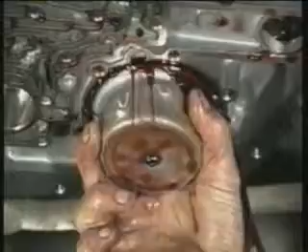Welcome to the world of the Transgo High Performance Shift Kit. In this video presentation, we'll show you step by step how to beef up your turbo-hydromatic 4L80E transmission fast and easy with a Transgo Performance Shift Kit. You'll love it. This transmission is about to come alive.

Video shows a typical installation with the trans still in the vehicle. It will help you install this kit with confidence. While you are watching this video, stop the tape often and read the instructions. This booklet has the specific instruction. Follow the booklet to the letter through the entire installation. During the installation, finish and review each step before moving on.

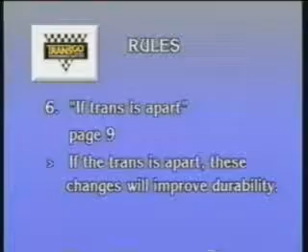When installing springs, follow the instruction sheet for customizing options, size, location, and color. When drilling holes, follow the instructions for their location, size, and customizing options. Follow the Shift Kit customizing options when they apply to this installation. Notice the If Trans is Apart page 9. If the trans is apart, these changes will improve durability. These are the typical tools needed to do the installation.

First, let's road test the vehicle to see if the transmission is in good working condition. We just want to be sure it has 4 forward gears and reverse. Place the shift lever in the D or third position, not the OD position. Push the gas pedal to about 1/4 throttle. Feel the 1-2 and the 2-3 upshifts.

Then at 45 to 50 miles an hour, move the lever to the overdrive position to feel 4th. This will tell us if the valve body is working normally. Then try some upshifts at 3/4 throttle to see if the clutches are in normal condition. They're holding okay. Let's get started.

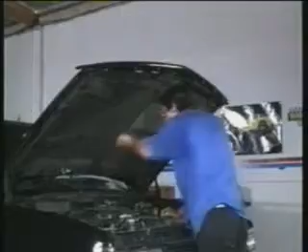Release the hood latch. Let's raise the hood and remove the transmission dipstick. Okay, let's jack the front of the vehicle up like this. Place 2 stands, one here and one here. Now we can jack up the rear. When you're done, it should look like this. Please use sturdy jack stands.

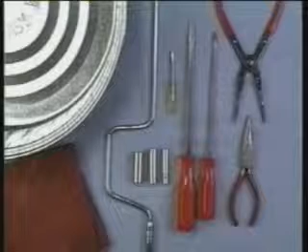Before we go under the car, let's gather the required tools. We will need 8, 10, and 13 millimeter sockets, a speed handle, long screwdriver, small screwdrivers, drain pan, snap ring pliers, needle nose pliers, and some wiping rags.

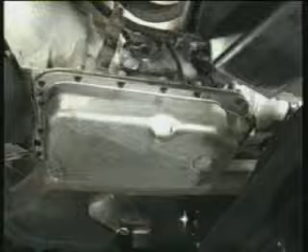Let's make sure you have the transmission that this kit fits. Notice the pan is large, rectangular, rounded here in the back corners, and it has 17 pan bolts. Here on the driver's side, toward the rear, we have this large electrical connector and many wires going to it. Here's the line pressure tap and the shift linkage. This is the right transmission. Let's get going.

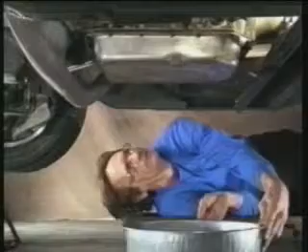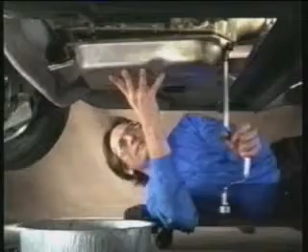Place a drain pan under the transmission, favoring toward the front. With a 10 millimeter socket and a speed wrench, remove all the oil pan bolts except for the one toward the rear here. Then loosen the last bolt slowly and let the oil run over the front edge of the pan. Lower the pan.

Look here in the pan. It has some debris, which is normal. This magnet is to collect any steel filings. This one is pretty clean. No problem here. The original factory pan gasket is a controlled compression type. If it looks like this and it is not damaged, reuse it. Let's lay the pan and gasket aside for now.

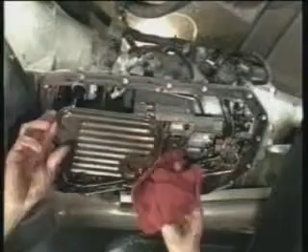Now let's get ready to remove the filter. Have the drain pan in position to catch the fluid that will run out of the filter and valve body. If the transmission oil is still hot, protect your hands with a rag. While pulling down slightly, twist left and right until the filter frees up enough to be removed.

Place the filter in the transmission pan. Make sure the filter seal here is in good shape. Ours looks okay, so we'll reuse it. Make a simple drawing of the wiring and connectors so you will know how to reconnect them.

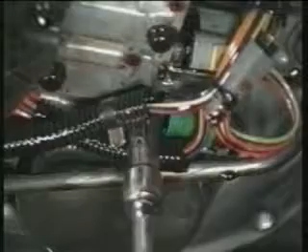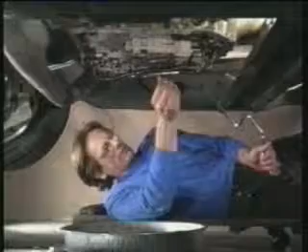With a speed handle, let's remove these 4 10mm bolts. First, remove these 2 bolts. And lay this plate aside. Now remove this bolt. And finally this one. These are the electrical terminal connectors that we will be removing. This is the 6 connector type.

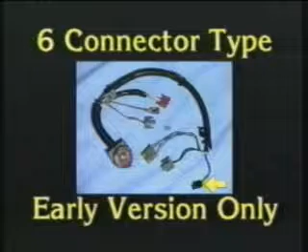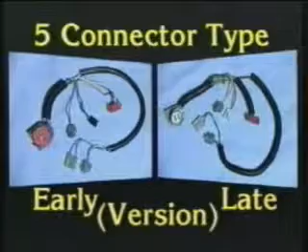This is the 5 connector type. Let's start here at the force motor. Remove its connector here. Now the pulse width modulator solenoid connector. And if yours has a connector here, then remove it now. Most have been updated and will not have a temp sensor connector at this location.

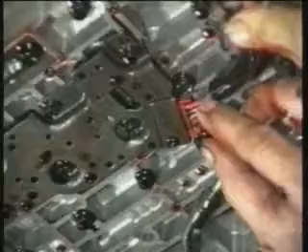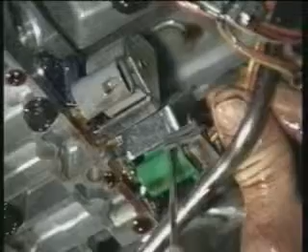Remove this connector here at the manifold plate. Now we can remove these 2 solenoid connectors. A connector here and B connector here. Now let's tuck the wiring harness out of the way, like this.

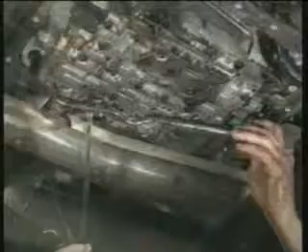This pipe is held on with these 2 bolts and clamps. Remove this bolt. And finally this bolt. Now carefully pry the pipe from the case. Lay the pipe in the pan.

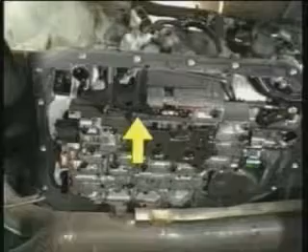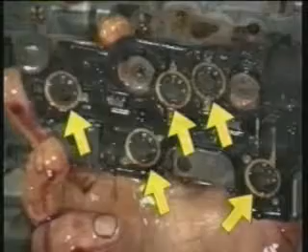Now we're ready to remove this detent spring by removing these 2 bolts here and here. Lay these parts in the pan. To remove the pressure switch, remove these 6 8mm bolts. Hold the switch with the other hand as you take out the last bolt. Be sure these 5 O-rings are still in place. If not, stick them in place with some Vaseline.

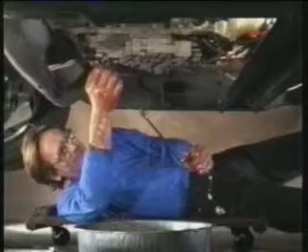Be sure the drain pan is still in place to catch the fluid that will drain from the valve body and transmission. Now remove the rest of the valve body bolts, except this one here. Loosen this last bolt 2 or 3 turns and let the valve body drain. Now remove the last bolt and lower the valve body. The separator plate will come down at this same time.

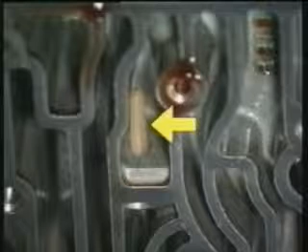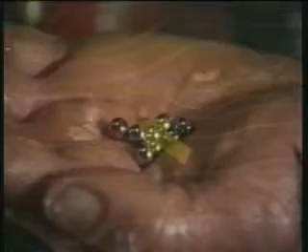There are 8 check balls and a screen above the plate. The screen should stay in place here in the case. If it doesn't, install it here in this passage. It's to keep the force motor and pulse width modulator solenoids clean from debris. Don't lose any of the check balls. Don't worry, we will show you where they go. Also, the instruction booklet on page 6 shows their location. Turn the assembly over and lay it in the pan so it can drain.

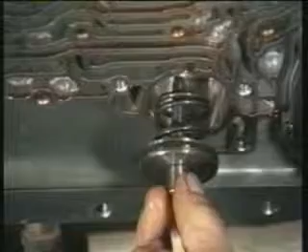Now remove the intermediate servo assembly from the case bore. Lay the servo pieces in the pan. Remove these 6 bolts from the reverse servo cover. And remove the cover. Remove this reverse servo assembly. Notice this is the inner piston and spring for the 1-2 accumulator assembly. Lay these parts in the pan.

Find a pair of long nose snap ring pliers like these to remove this snap ring. It holds the pressure regulator and boost system in place. Be careful here. The parts above the snap ring are under some spring tension. Carefully push up and release a few times so the bushing will come down without sticking. Remove the snap ring.

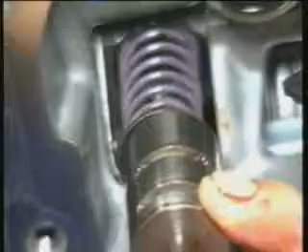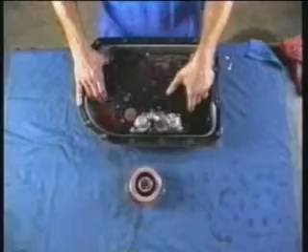Then remove the boost bushing and valve, along with the pressure regulator spring and valve. Use a pair of needle nose pliers to remove the pressure regulator valve if it sticks in the bore. Put these pump parts in the pan. Now let's take the pan with the valve body and parts to the bench. Remove all the parts from the pan and organize them on the bench so you can find them as you need them. Clean your pan.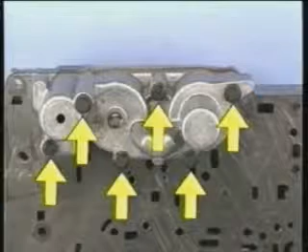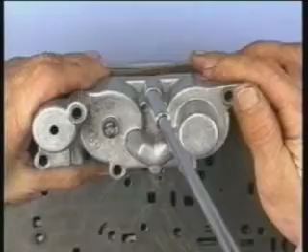We need to remove these 6 bolts from the accumulator housing to separate the accumulator from the valve body. Remove these 5 bolts first. And now have a buddy hold the accumulator while you unscrew this last bolt slowly. There is spring tension on this body. Set the accumulator housing and separator plate aside for now.

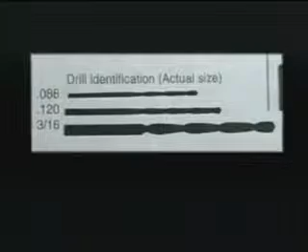Use a center punch and make a dink about 1/4 inch below the gasket surface into this passage between the X's. Like this. To find the correct drill, follow this chart. Use the 120 thousandths bit furnished and drill a pilot hole here between the X's through this partition left to right. Take the 3/16 drill bit and wrap some black electrical tape around the shank of the bit from here to here to protect the valve body as we drill.

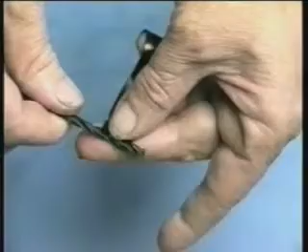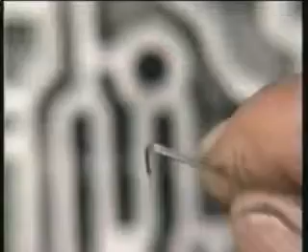Now, enlarge the hole at this angle. It will look like this when you're finished. Good job. Before going on, use one of the paper clips furnished and make a tool to help remove the accumulator valve. Find the nail furnished in the kit and use it to push this roll pin out, like this.

Now, remove the plug, the spring, and the valve. Lay these parts aside until we're finished drilling. Discard the original spring and plug. Lay out the new parts.

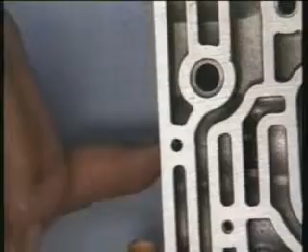Install the valve into the bore. Use the nail to push the valve to the bottom of the bore, like this. Install the small inner spring. Now install this outer spring. Next, install the O-ring onto the plug and lube it. Finally, install the plug and this roll pin.

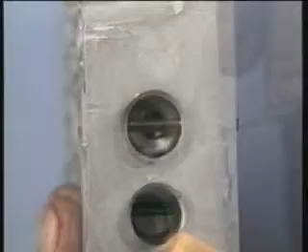Remove the roll pin using the nail like this. Remove the manual valve and use a long pencil to push the plug and screen out of the end of the bore until you can grab them. Remove and discard the screen O-ring. Now clean and flush out the bore.

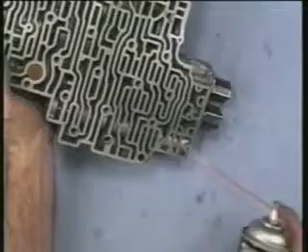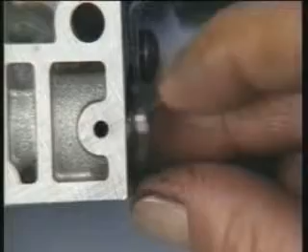Lube the new O-ring and install it onto the new inner tapered plug. Insert the plug into the bore and push it to the bottom with your finger, like this. This screen needs to be in good shape. The screen is available at dealers and transmission shops around the country. Now, insert the spring into the screen and push them into the bore.

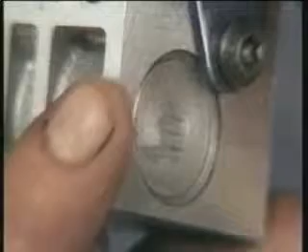Install the new end plug with the hole in it. Install the roll pin through the new plug, like this. It'll look like this when you're done. Picture. Pay attention to the springs and where they go.

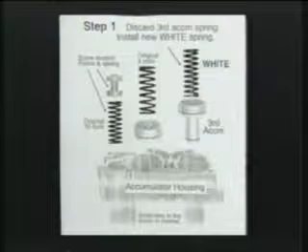If your accumulator has this valve and spring, install the spring first and then the valve. Lube this piston ring and install the piston with the original spring. Now lube this piston and install it into this bore.

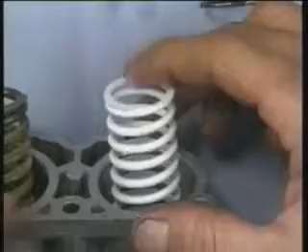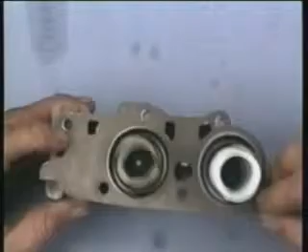Install the white spring. Yes, we will discard this original third accumulator spring. Position this gasket on the accumulator housing. Now we are ready to bolt this housing back onto the valve body. Next, we need to install the valve body gaskets, the separator plate, and accumulator body.

Position this VB gasket onto the valve body. Temporarily place these two bolts into these two holes to align the plate and gasket to the valve body. Now oil this side of the separator plate. Remove these bolts. Now, install the TC gasket. Again, use the two bolts to align the gaskets and plate to the valve body.

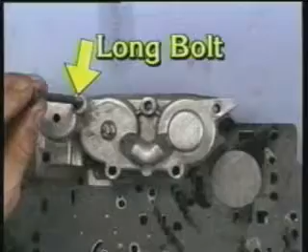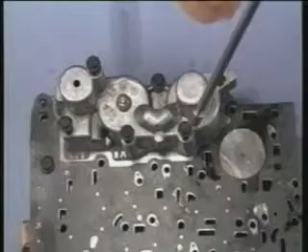Lay the accumulator gasket on the valve body here. Install the white spring here and this accumulator original spring here. If your trans has this valve, then hold it into the accumulator bore as you lay the accumulator housing onto the valve body. Notice this bolt is a long one. Install the bolts in a few turns. Make sure everything is aligned. Then tighten the housing bolts evenly.

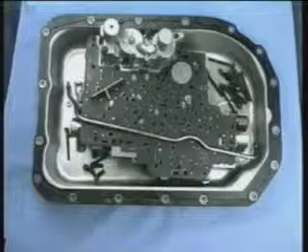Use some Vaseline to hold the balls in place on the plate. 1, 2, 3, 4, 5, 6, and then 7. No check ball goes here. Double check the instruction sheet for proper positions of the balls. Remove the 2 Z-bolts. Install the manual valve. Lay the valve body in the clean pan with the relief valve and pan bolts.

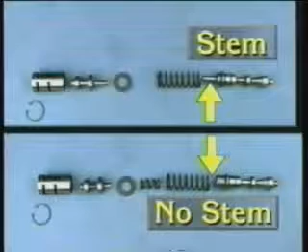Let's go to page 7 and look at the 2 different types of pressure regulator systems. Our vehicle has this no stem type here, so we will be using this system. Lay the pressure regulator parts out on the bench. Discard this old pressure regulator spring and use this new green spring. Now discard this original damper spring and use the damper spring according to the instructions.

Discard the boost valve and washer. Use these new parts here. Notice the wide lands on the new boost valve. The kit furnishes a new snap ring in case the old one gets damaged or lost.

If yours looks like this, then do this. Lay the pressure regulator parts out on the bench. Discard this old pressure regulator spring and use this new green spring. And use the damper spring according to the instructions. Discard the boost valve and washer. Use these new parts here. Notice the wide lands on the new boost valve. The kit furnishes a new snap ring in case the old one gets damaged or lost.

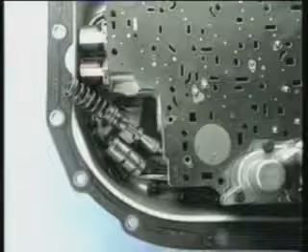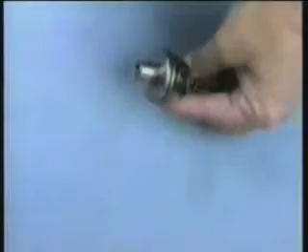Lay these parts in the pan. We will install them in a few minutes. Let's go to step 2. The pin goes through the piston like this. Install the original spring onto this end of the pin against the piston. Now install the hollow sleeve onto the outboard end of the 1-2 servo pin. Lube the O-ring and lay this assembly in the pan. Go to step 3 of the instructions.

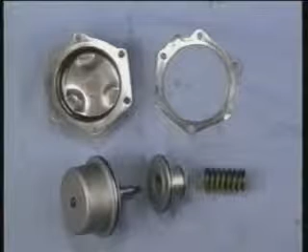Lay out the rear servo parts and replace this original spring with the new one from the kit. Lube these accumulator sealing rings and piston assembly.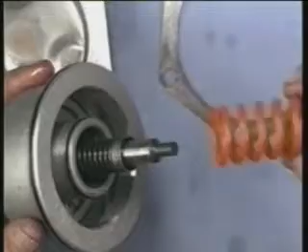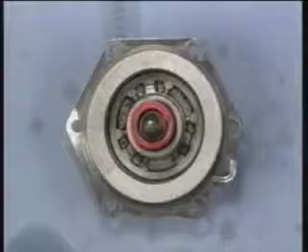Insert this inner 1-2 accumulator piston into the larger outer piston. Install the new orange 1-2 accumulator spring. Lay this steel gasket on the cover and lay this assembly in the cover. Now they're ready for installation when we go back under the vehicle.

Lay these parts in the pan. Take all these parts in the pan back to the vehicle. Clean all the gasket surfaces. Check to see that this filter is still in place.

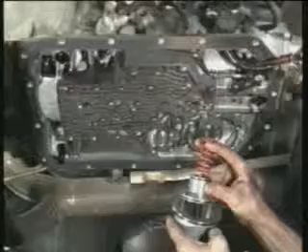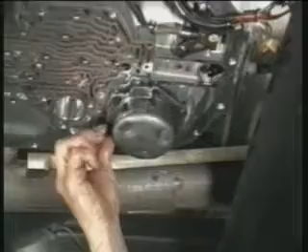Let's install this low reverse servo assembly like the instruction sheet shows. Push this assembly into the bore. Install the gasket and cover by starting these bolts. Let's tighten them evenly.

Turn to the top of page 7, step 1 of the instructions, and read about the pressure regulator system. Now let's go install these pressure regulator parts. Prepare for this job by locating a pair of snap ring pliers and a long screwdriver. Install this spring onto this end of the pressure regulator valve and push them up into the bore using your finger as a guide.

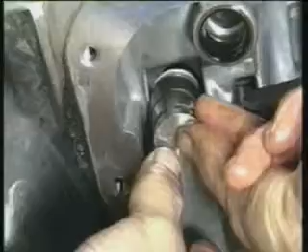Now, make sure the new boost valve is in the sleeve with the new washer and bumper spring. Install them into the bore. Push up with the long screwdriver and install the snap ring. If you just don't have enough hands, get a buddy to help you.

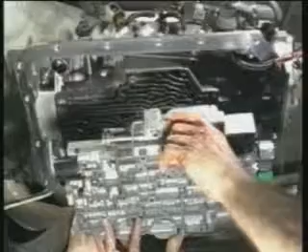Step 2 shows the proper assembly of the intermediate servo. The pin goes through the piston, then install the spring. Make sure this bushing spacer is on the pin as shown. Let's install this assembly now. Push it up into the bore. Have a buddy hold this piston and bushing in place with a thin, long screwdriver while you start this Z-bolt into the valve body.

Pull this dipstick stop bracket. Now let's remove these two bolts and install the relief valve. Tighten all the valve body bolts evenly. Refer to our simple drawing and reconnect the solenoid and switch wires.

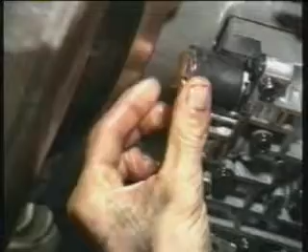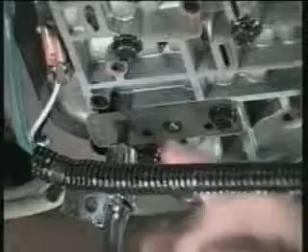Be sure to install these wire brackets. If necessary, remove any bolts that will let you install the brackets back into place, like your drawing shows. Looking good. Now double check each bolt for tightness. Let's look over everything carefully, then we will be ready for the filter.

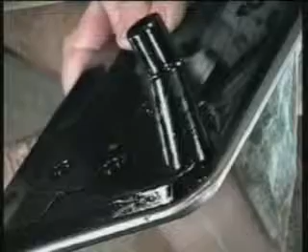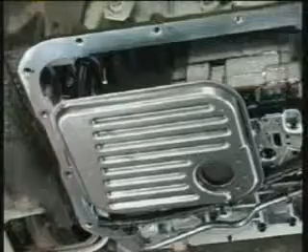Check the filter in this area for any cracks. If it's okay, lube the seal and install the filter. Lay the gasket on the pan and push 2 bolts up through the pan and gasket. Lift the pan into place and start these 2 bolts. Finish installing all the rest of the bolts and then tighten them evenly.

Looks good. Add 7 quarts of fluid and start the engine. Now immediately add 3 more quarts and check the dipstick for full. Look, it is still about a pint low. Let's add and recheck. There we go. It is still a little below full. After it warms up, we'll check it again.

While the vehicle is still in the air, hold the brake and run through the gears from park to reverse, neutral, OD position, D, second, and now first. Let's move the selector to the OD position and accelerate, checking for upshifts. As it shifts, watch the speedometer change speeds. There's the 1-2 shift, the 2-3 shift, and finally the 3-4 shift.

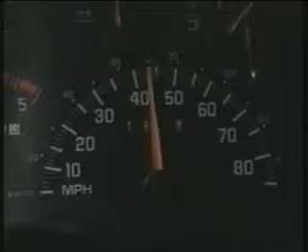Okay, we can lower the vehicle. After the road test, you can check the fluid level again. Let's road test the vehicle and check its performance. Start with the throttle shifts, feel the 1-2, the 2-3, and the 3-4 shift. This will tell us if the valve body is working normally. Do we have good, quick, crisp shifts with no delays? Now try some upshifts at 3/4 throttle to see how the shifts get firmer with throttle.

One is okay. Let's go on. Yes, this transmission has come alive. This kit gives you the shift feel you want when you want it. Yes, with the gear command feature, you're in control, and it still delivers full automatic shifts in the drive position. It fits all these hard-working trucks. It gives each owner performance satisfaction with a vehicle that has longevity.